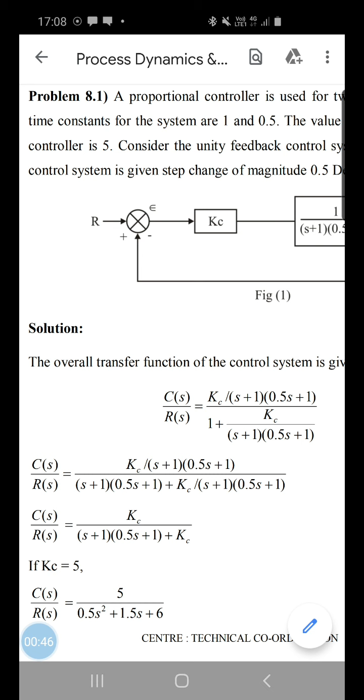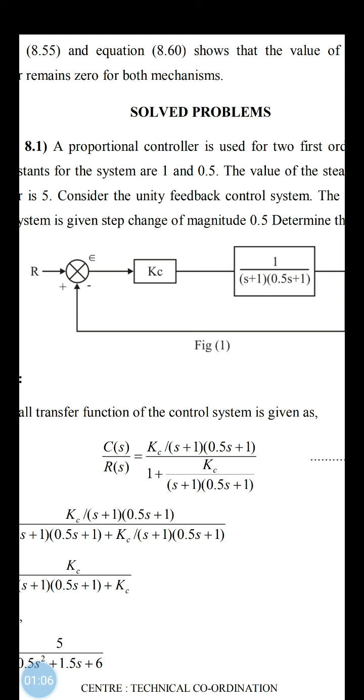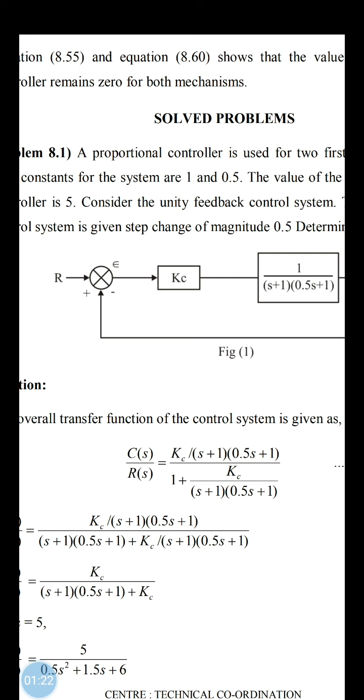So we'll discuss first problem 8.1, where a proportional controller is used for two first order systems whose time constants are 1 and 0.5. So you can see the diagram where tau 1 is 1 and tau 2 is 0.5. The value of steady state gain for the controller is 5, meaning Kc is equal to 5. Consider the unity feedback control system, same as we discussed earlier. The set point of the control system is given a step change of magnitude 0.5 and you have to find out the offset for the given system.

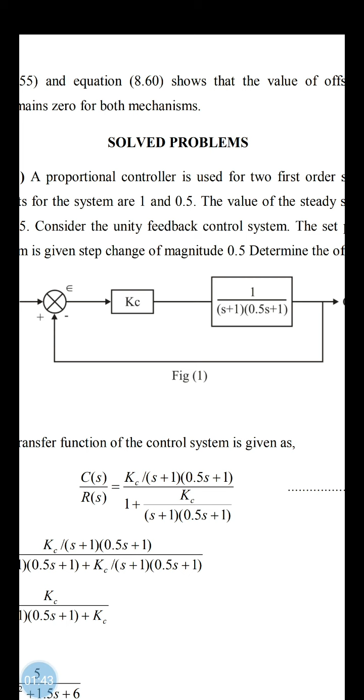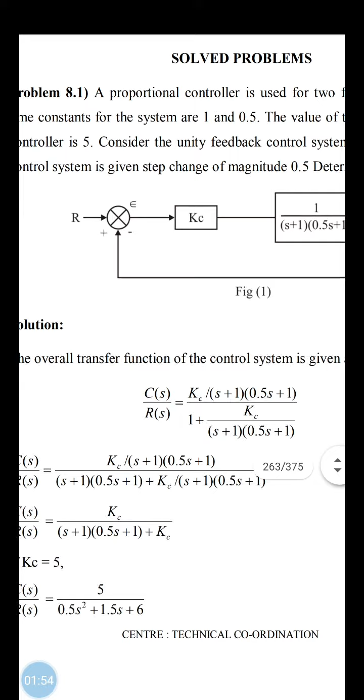Sometimes you may get the overall transfer function, or sometimes such a block diagram will be given. From such a block diagram you have to find out the overall transfer function, C of S by R of S. C is the control variable, R is the set point. The numerator of C by R is the product of both transfer functions, Kc into 1 upon (S plus 1)(0.5 S plus 1).

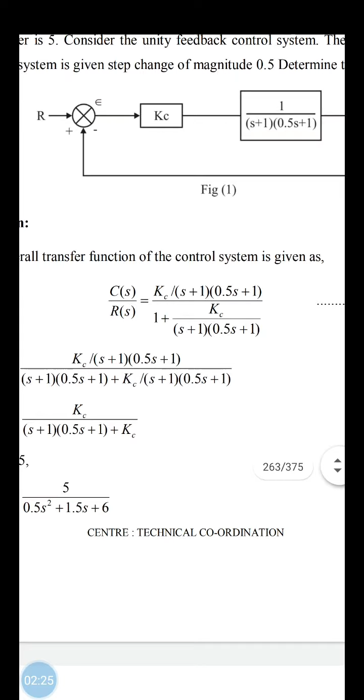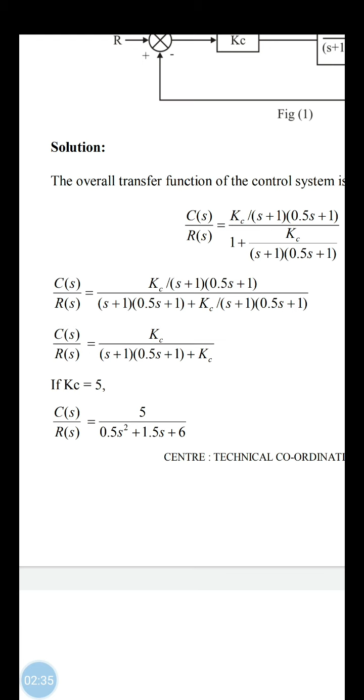What will be the denominator? It will be 1 plus GH. G into H is the product of all the transfer functions in the block diagram. So it is 1 plus the product of these two transfer functions, Kc upon (S plus 1)(0.5 S plus 1). So first of all you have to find out the overall transfer function of the control system in such problems, and then solve it. You will get C by R, if you put Kc equal to 5, as 5 upon 0.5 S square plus 1.5 S plus 6.

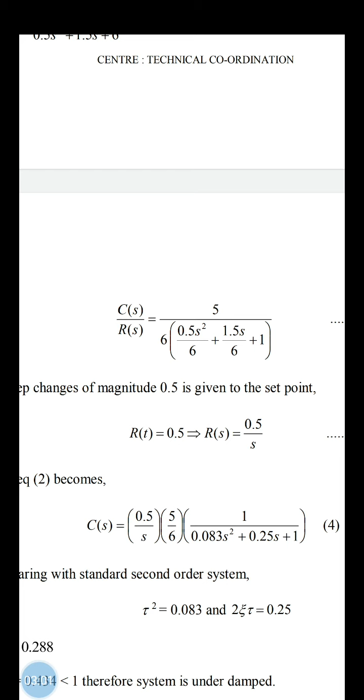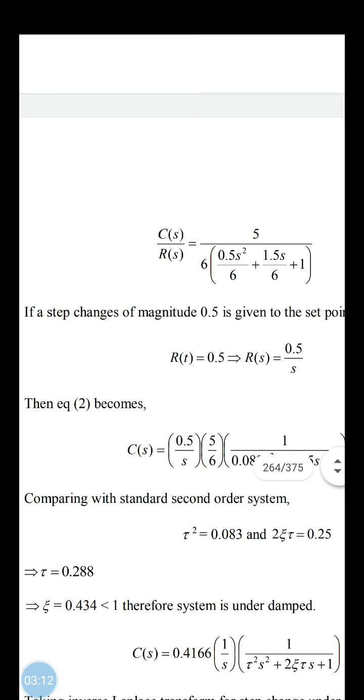Now you have to bring this equation into the form of a second order system because S square is there. So you can write 5 upon 6 into this bracket. In the problem it is given that a step change of magnitude 0.5 is introduced in the set point, so R of t is equal to 0.5, and R of s is equal to 0.5 by s. Introduce this 0.5 by s in the equation: C of s is equal to 0.5 by s into 5 by 6 into 1 upon (0.083 s square plus 0.25 s plus 1).

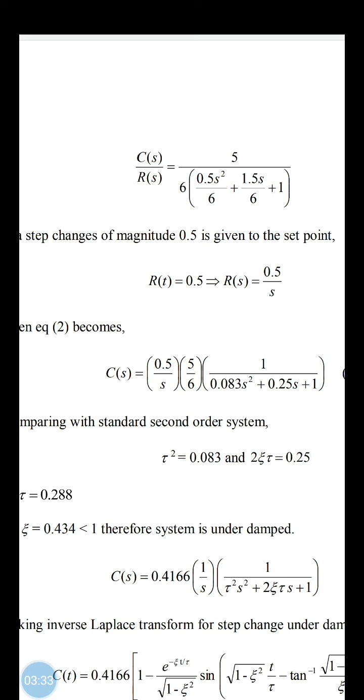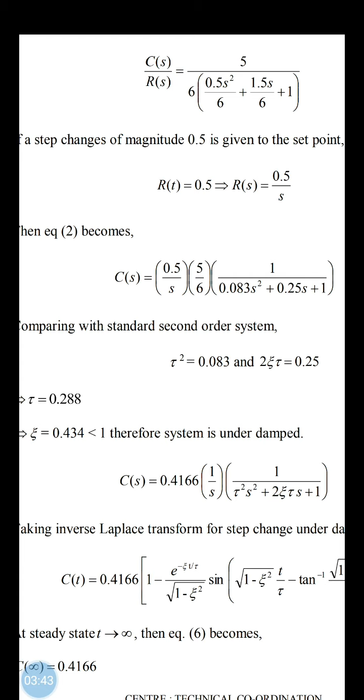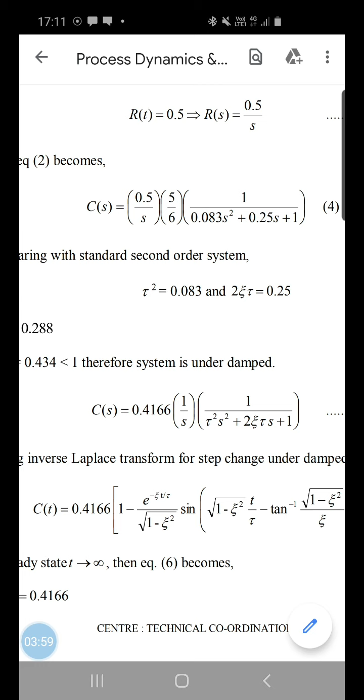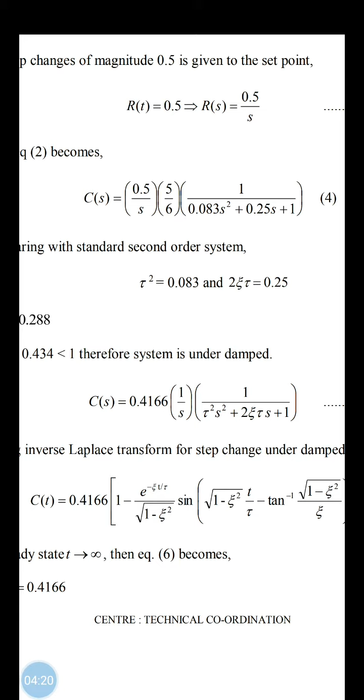You will find this equation is similar to the second order system step change. So you can compare that equation with the following one: C of s is equal to 0.4166 into 1 by s into 1 upon (tau square s square plus twice zeta tau s plus 1). If you compare equation 4 and equation 5, you get the amplitude, tau square, and twice zeta tau. So tau square is 0.083, twice zeta tau is 0.25, and from this you can find tau and zeta.

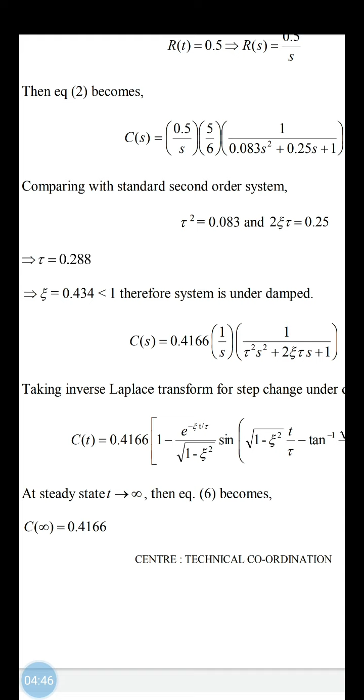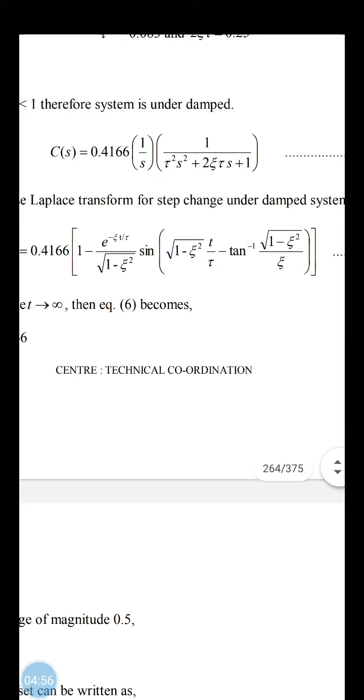Tau is 0.288 and zeta is 0.434, which is less than 1, so this is an underdamped system. So this is an underdamped second order system with a step change. Your objective is to find the inverse Laplace of C of S. It will be the same equation that we studied for the second order step change underdamped system. This constant 0.4166 will remain as it is.

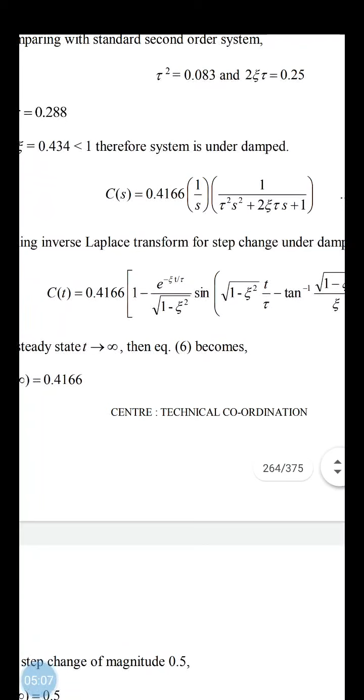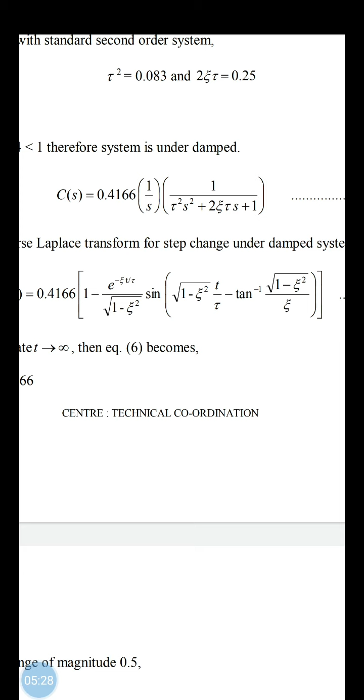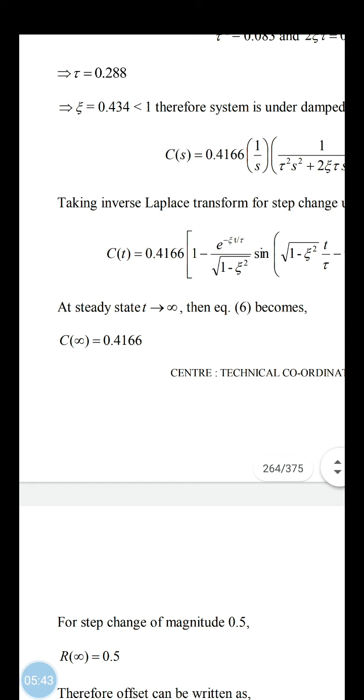What will be the equation? C of t is equal to this constant into 1 minus e raised to minus zeta t by tau upon square root of 1 minus zeta square, into sine of (square root of 1 minus zeta square into t by tau, minus tan inverse of square root of 1 minus zeta square upon zeta). Don't worry, this is a big equation, but if you put t equal to infinity, the exponential term becomes 0, and 1 minus 0 is 1. So C infinity becomes 0.416.

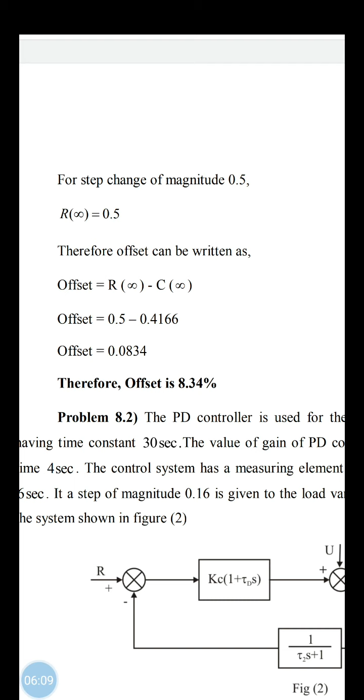You will ask why we calculated this? Because we want to calculate the offset. What is offset? R infinity minus C infinity. You have calculated C infinity. Now what is R infinity? It will be the step change in the set point, 0.5, which remains the same. So offset is R infinity minus C infinity, equal to 0.0834. Therefore, the offset provided by this proportional controller will be 8.34 percent. So this is how you calculate the offset for a given block diagram.

Such problems are frequently asked in examinations. At least one problem will be asked in the examination. Now the next problem will be problem 8.2. Again, it is a similar problem, but this is a PD controller.

You will ask that we have not studied a PD controller, then how to solve? You go for solving, you will get an idea.

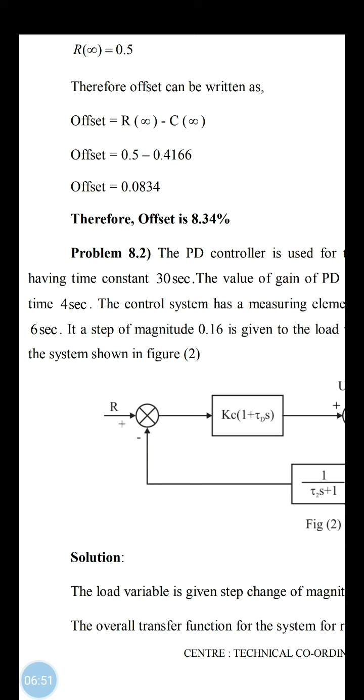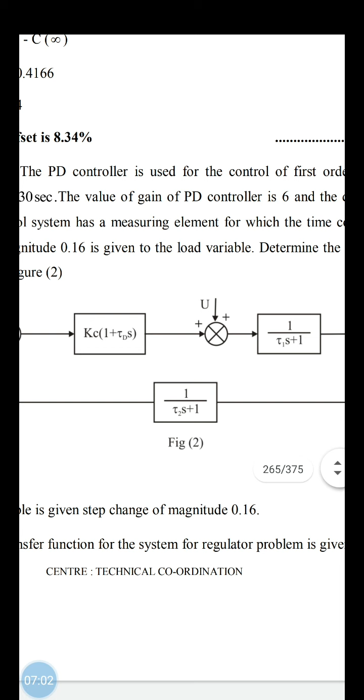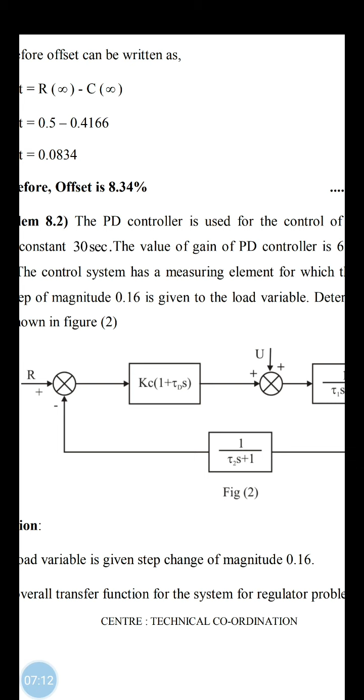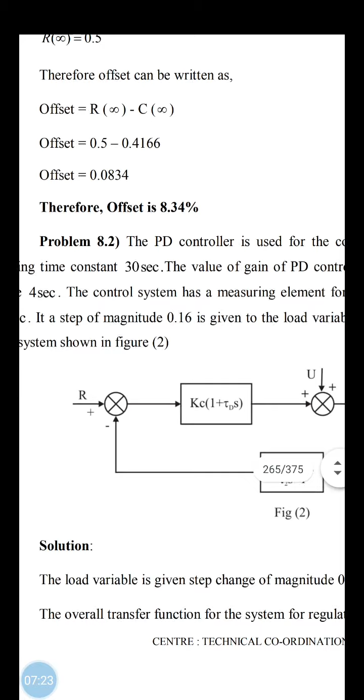Then the value of gain of PD controller is 6. The derivative time is 4 seconds. The control system has a measuring element for which the time constant is 6 seconds. If a step of magnitude 0.16 is given to the load variable, determine the offset for the system shown in figure 2.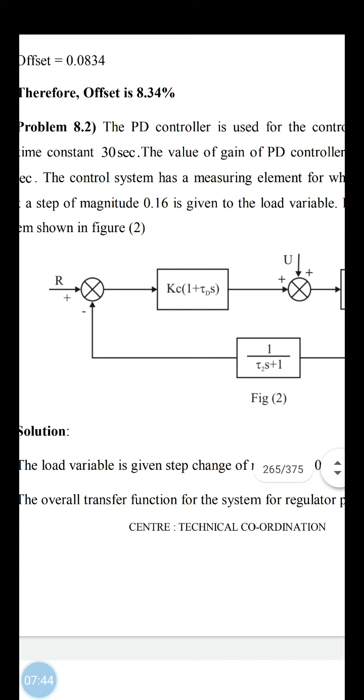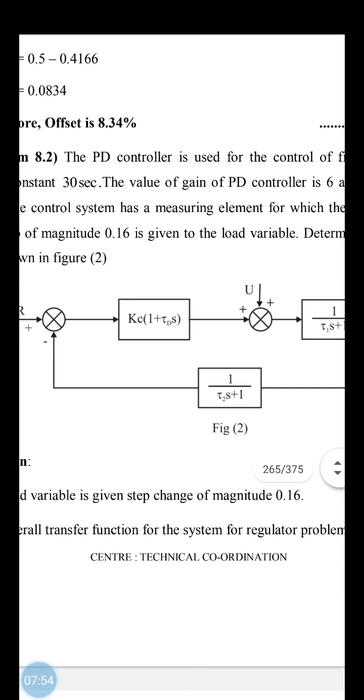So again a similar problem for PD controller whose transfer function is given as Kc into 1 plus tau d s. This is the transfer function for the first order system, 1 upon tau 1 s plus 1. This is the transfer function for the measuring element, that is also first order, 1 upon tau 2 s plus 1. So this is the system given, and you have to introduce a step change in a load variable.

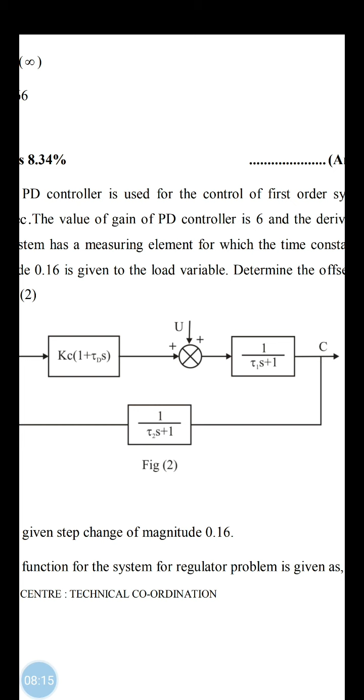What do you have to find out? You do not have to find out C by R here. Is it right? Are you getting it? It will be C by U. Is it right? So you have to find out here the overall transfer function for a regulator problem, because it is given.

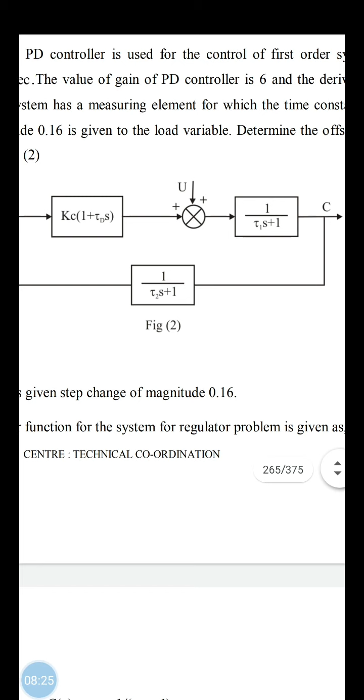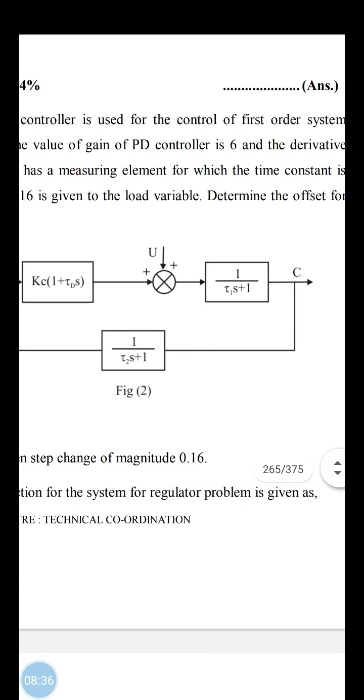So for a regulator problem, C by U is equal to what? It is a product. Product of what? C by U is the block between C and U, which is only 1 upon tau 1 s plus 1. See here, 1 upon tau 1 s plus 1.

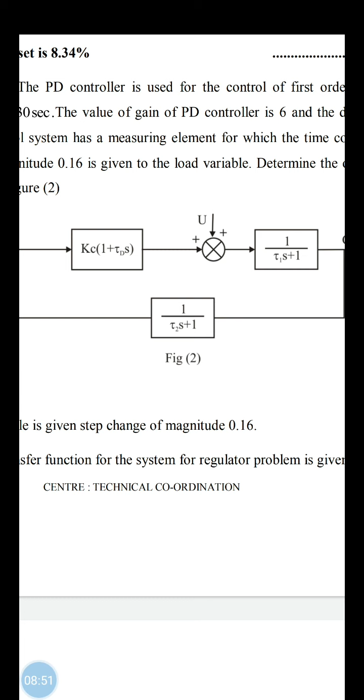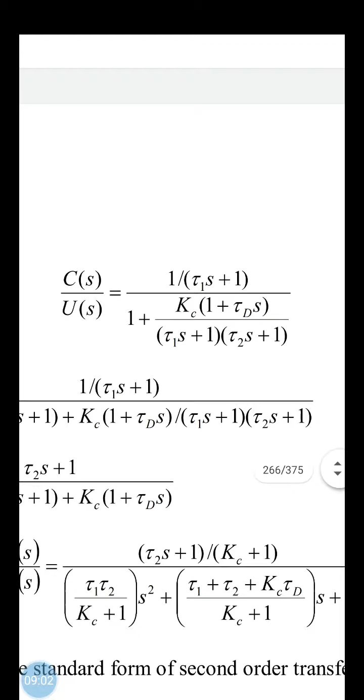What will be the denominator? It will be 1 plus GH, 1 plus the product of all the transfer functions. So 1 plus Kc into 1 plus tau d s, multiplied by the first order system, multiplied by the measuring element. See here, the denominator, 1 plus G into H. So you have to solve this C by U and bring it into this form. It will come into this form.

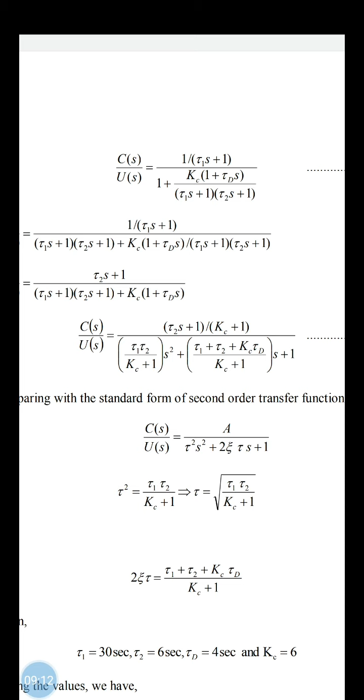Again a second order system. So this is a second order system. C by U is equal to A upon tau square S square plus two zeta tau S plus 1. Where what is tau square? Compare with equation 8 above. Tau square is tau 1 tau 2 upon Kc plus 1.

You can find out tau. Twice zeta tau is equal to, bracket, second bracket, tau 1 plus tau 2 plus Kc tau d upon Kc plus 1. That will give you the zeta value.

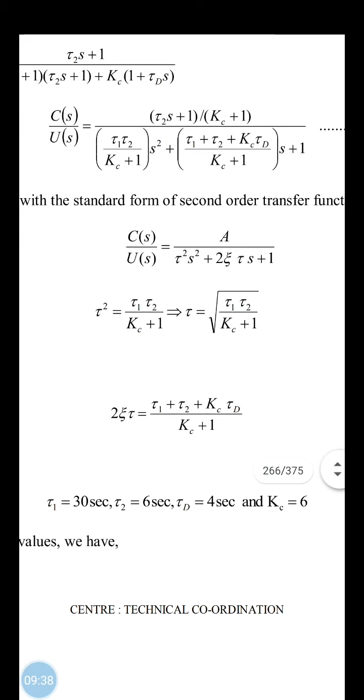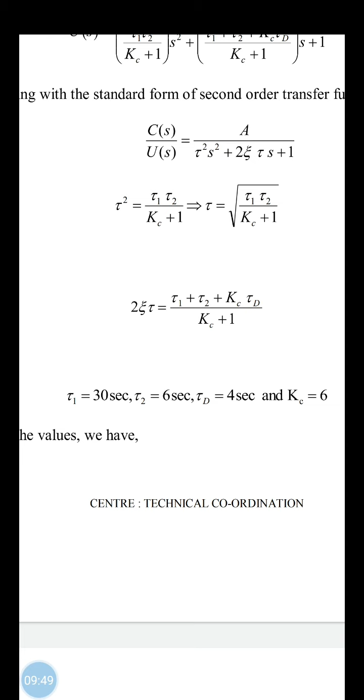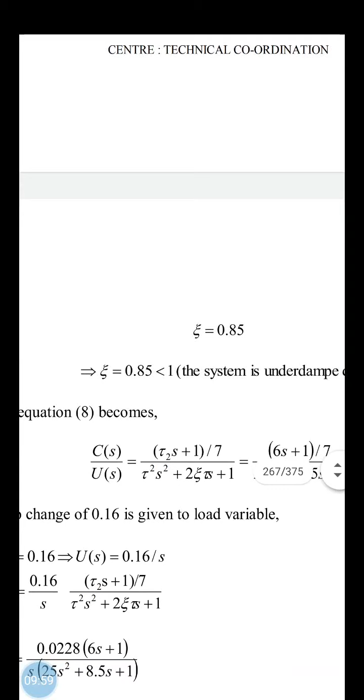Now you put all the values given in the problem. Tau 1 is equal to 30 seconds, tau 2 is equal to 6 seconds, tau d is equal to 4 seconds, Kc is equal to 6, and you can find the value of tau and zeta. Putting these values, tau becomes 5 seconds, zeta becomes 0.85. Again it is less than 1, so the system is underdamped.

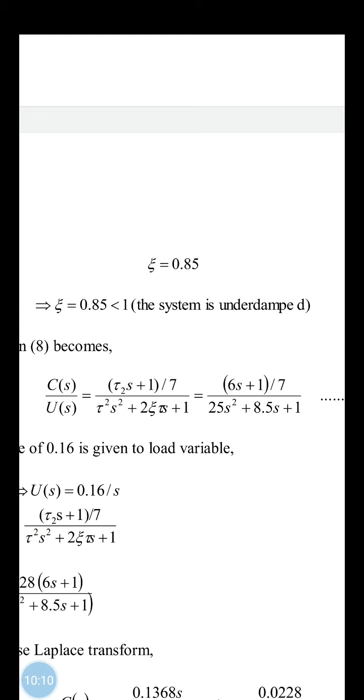So what is this system now? It is an underdamped system, step change, second order system. So you can write the equation like this: C by U is equal to this equation. Now we'll introduce the step change of 0.16 into the load variable. U of t is equal to 0.16, U of s is equal to 0.16 by s.

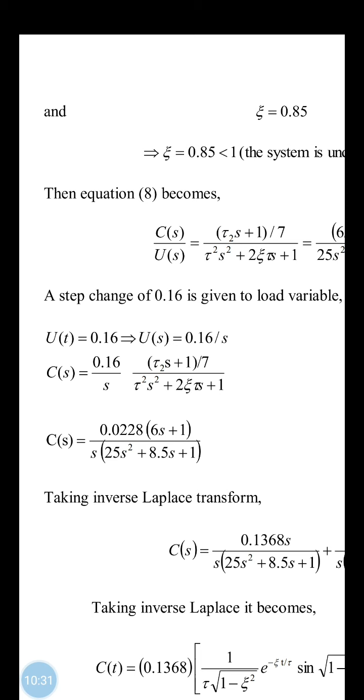So C of s is equal to this equation. So you will get this equation, C of s. You will get two different equations here. One equation where there is an s in the numerator and denominator, which will get cancelled, and another equation where there is a constant term upon s into this.

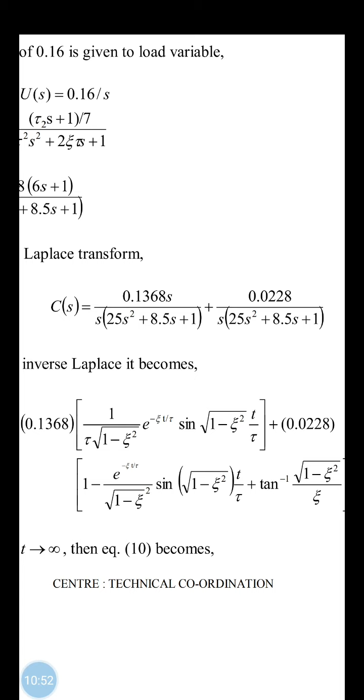So what will be the first term? In the first term the s will get cancelled. It will be nothing but the impulse change. Are you getting it? Second order impulse change. The second term will be a step change, underdamped system, second order, because there is a 1 upon s.

So see here, again you will get this equation. 0.1368 remains constant. This will be the first term for impulse change, and the second term, 0.0228 into this term, which is for step change.

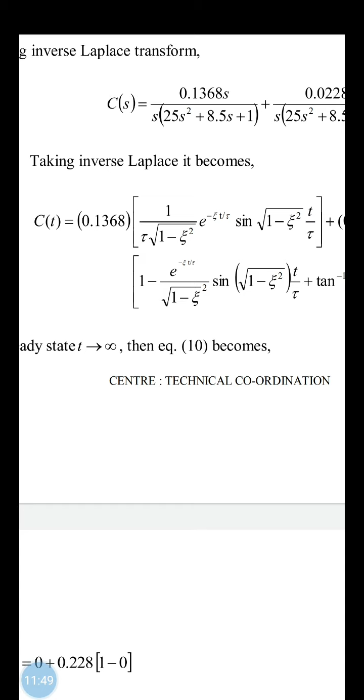Have you understood? So there is no s, so it is an impulse change. Go and check the impulse change in a second order system, you will find a similar equation. So you just have to write this equation, because in the next step, if you put t as infinity, everything becomes 0.

So C of t becomes equal to 0.228. Now here you do not have to take u infinity, because offset is not u infinity minus c infinity, it is always r infinity minus c infinity. So the set point remains constant, meaning r infinity is 0.

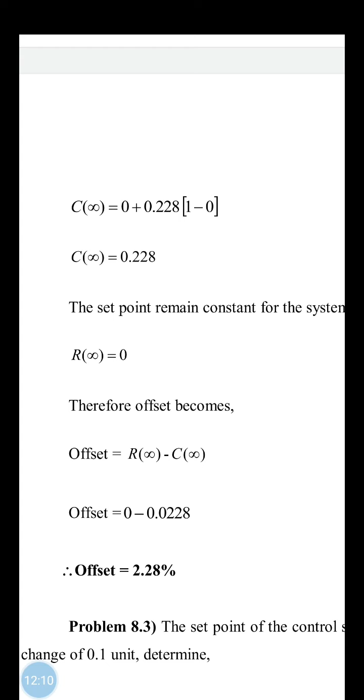So you can find out the offset is 2.28%. It may be plus, it may be minus, offset is the difference. So you can write it as 2.28%.

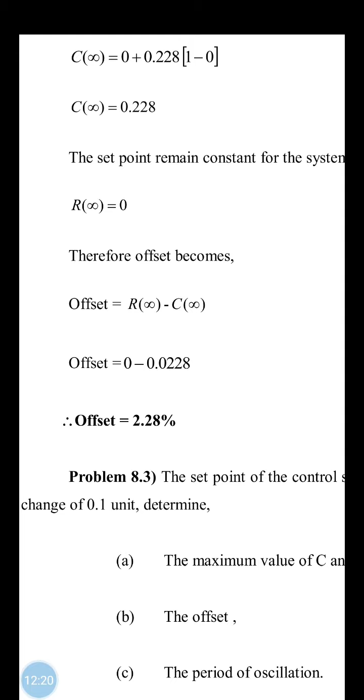We'll discuss the last problem. This problem is asked many times in examinations because it is somewhat simpler.

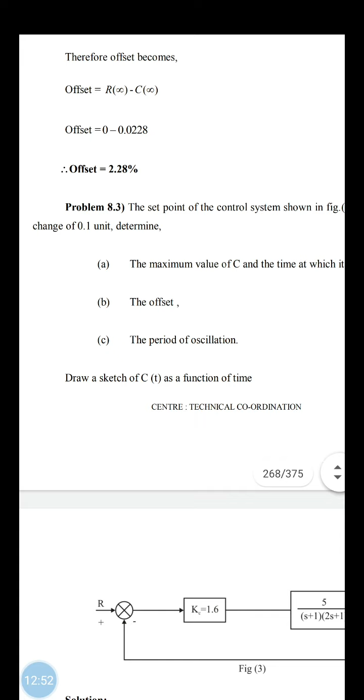What is the third problem? The set point of the control system is shown in the figure, given a step change of magnitude 0.1. What do you have to find out? Maximum value of c and the time at which it occurs, the offset, and the period of oscillation. Draw the sketch of c of t as a function of time.

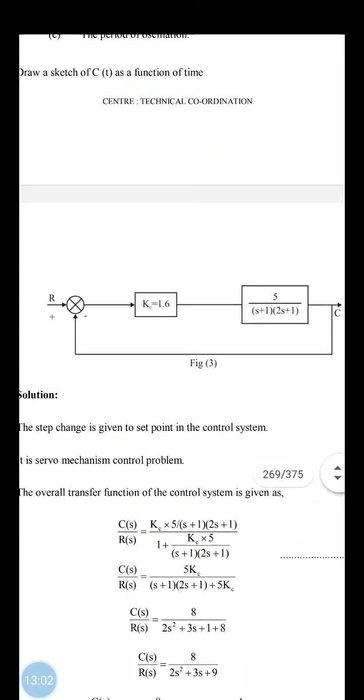So this is the system given. Again it is a unity feedback system. Kc value is given as 1.6. The process is given as two first order systems, 5 upon s plus 1 into 2s plus 1. What do you have to find out here?

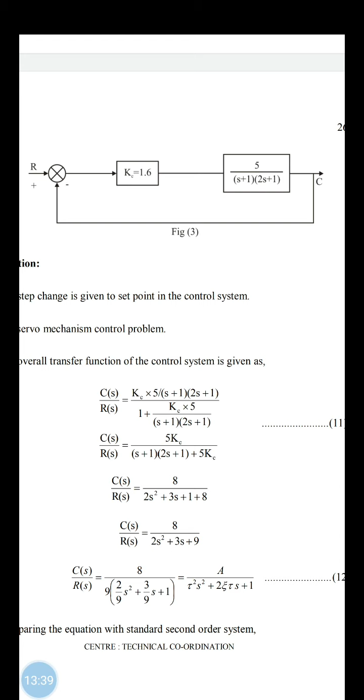C by R, obviously, because it is a step change in set point. Where the set point changes, that will be the equation. C by R when R is changing, C by U when U is changing. So you have to understand when to use C by R and when to use C by U. This is a servo mechanism problem, so you can write down C by R. What will be C by R?

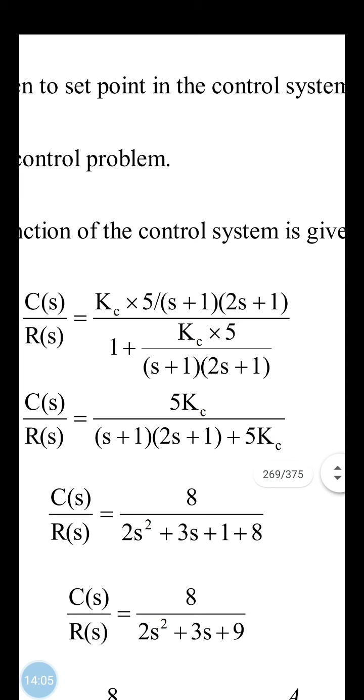C by R is the product of both block diagrams, Kc into this, given in the numerator. What is the denominator? 1 plus GH, 1 plus the product of all transfer functions, so it is 1 plus these terms. Understand this, then you will get this equation by solving it, putting in all the values of tau.

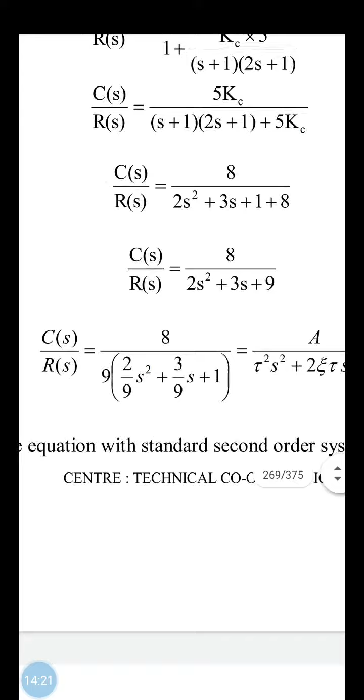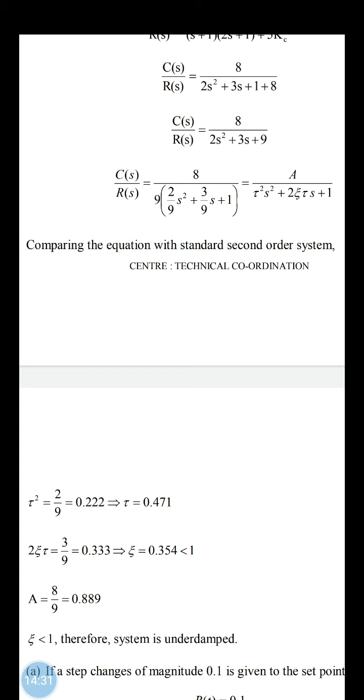So now you can introduce R of s. Okay, you can introduce a step change. Before introducing the step change, you can find out the value of tau square. Tau is 0.471, zeta is 0.354, and amplitude is 0.889. So what do you get again?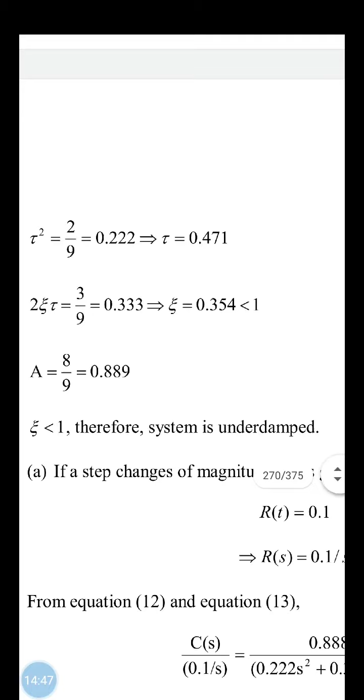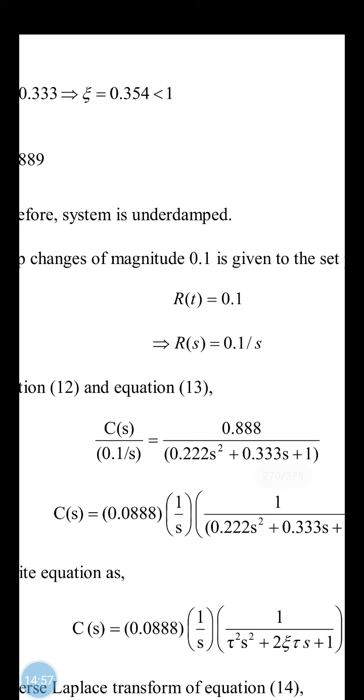Zeta is less than 1, so this is an underdamped system, step change second order, where this step change occurs. R of t is equal to 0.1, R of s is equal to 0.1 by s. Introduce this step change into the equation, you will get this equation: 0.0888 into 1 by s into 1 upon this whole equation.

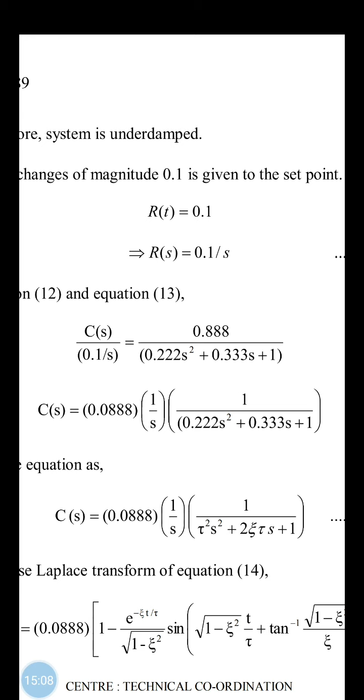Once you get C of s, can you compare this equation with the second order step change? Yes. The constant remains the same. What will be the inverse for C of s? C of t is equal to this constant into the equation for step change of an underdamped second order system.

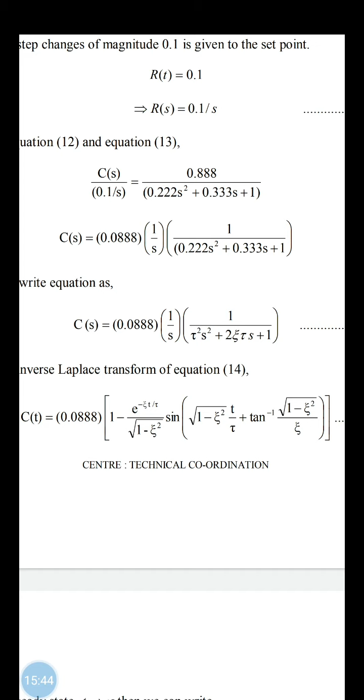What is that equation? 1 minus e raised to minus zeta t by tau, square root of 1 minus zeta square, sine of square root of 1 minus zeta square into t by tau plus tan inverse of square root of 1 minus zeta square by zeta.

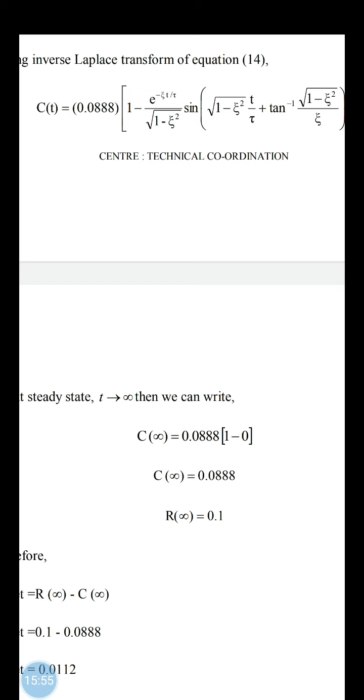So see here, putting the c infinity value, t is equal to infinity, it becomes 0.0888. R infinity is equal to 0.1. What you can find out is the offset. Offset is 0.0112, offset is 1.12%. So you have found the offset now.

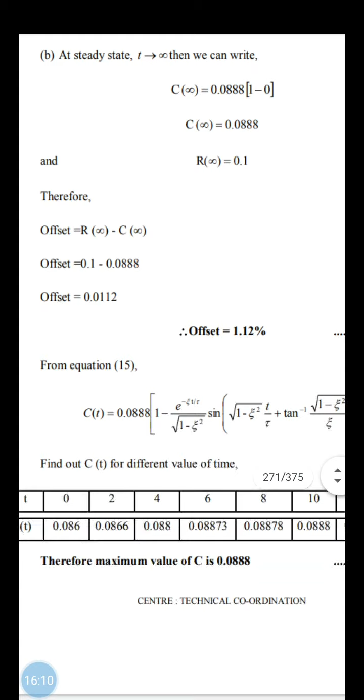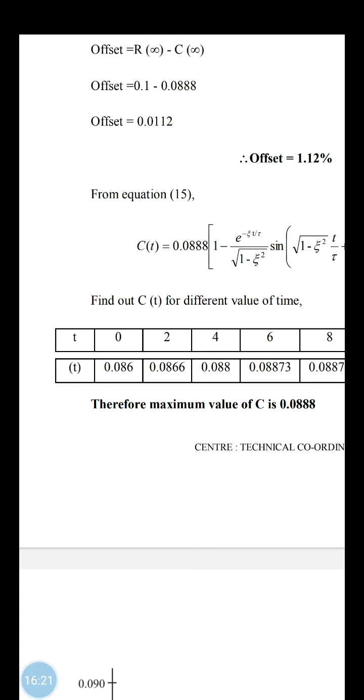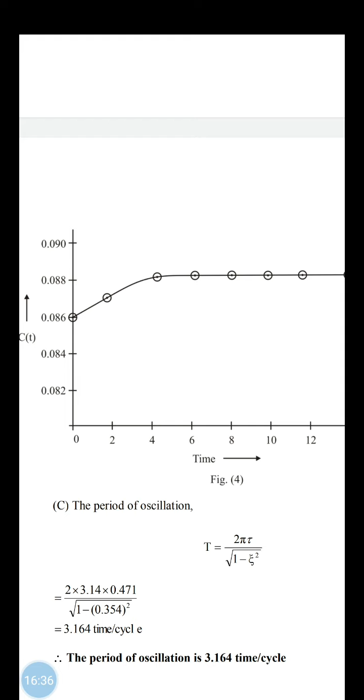What do you have to do? You have to plot the graph. So again you use that equation for c of t, putting different values of t and finding c of t. This will be the graph for c of t versus time. You will get this graph starting from 0.086, continuing to 0.0888, and it remains constant. This looks like a step change.

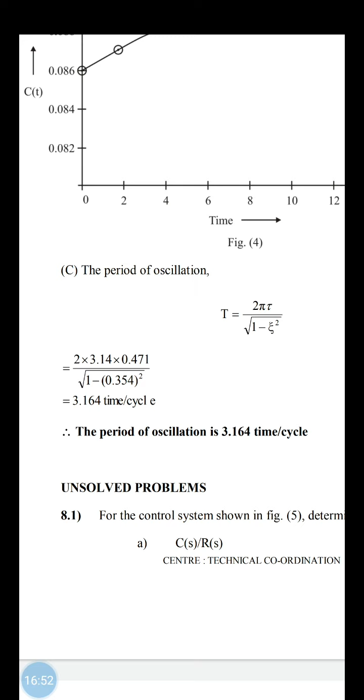Last, you have to find out the period of oscillation. You know the equation: t is equal to 2 pi tau upon square root of 1 minus zeta square. You know zeta, you know tau, you can put in this value and find out the period of oscillation is 3.164 time per cycle.

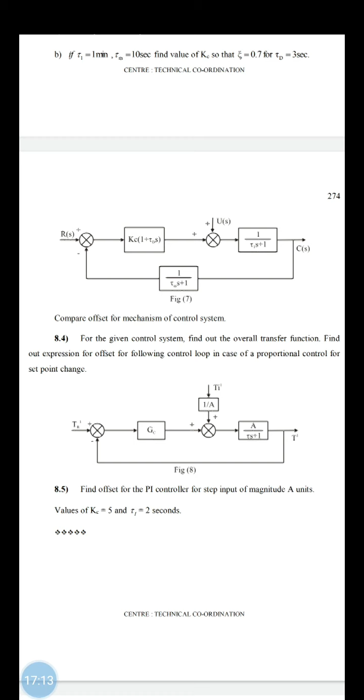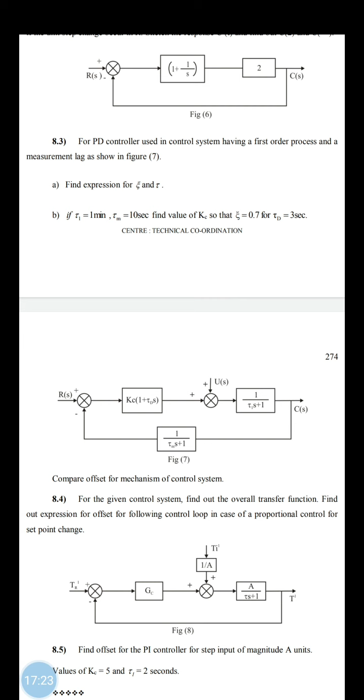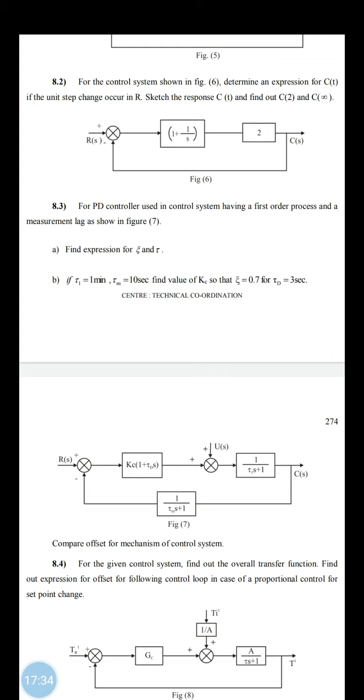So see how to find out this problem. There will be so many such problems. You solve these problems, and you will understand the process of how to find the answer for such a block diagram, where C by R is used as a servo problem and C by U is used as a regulator mechanism problem. You have to find C by R or C by U, find its inverse, introduce a step change, and find the offset value or period of oscillation, or plot the graph. These are the important problems from this subject, and thus we have finished the topics from process control.

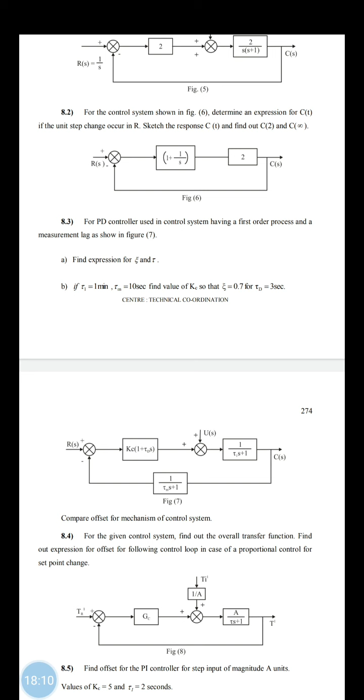Now remaining there are 3 chapters, out of which 2 are smaller ones, which we can finish within one lecture. That is called the stability method. There are 3 stability methods: Routh array, root locus in one lecture, and Bode diagram, which may require 2 or 3 more lectures. We'll try to complete most of this syllabus before the lockdown is over.